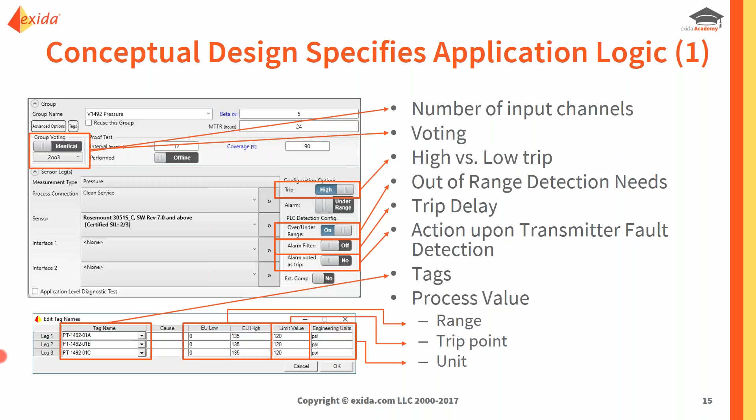Some other information that we specify in the sensor group are the tags. So there's this tags option. If you click on that, you see all this. Now here's your tag names. In this example, I'm talking about PT1492-01A, B, and C, with ranges of 0 to 135 psi and a limit value of 120. All that information is information that you need to program in your application program. So within the sensor group, there's a lot of information specified that you eventually will need to transfer into application logic. So next let's look at the logic solver.

All right, that's not so exciting. The logic solver, of course, from a conceptual design, you just select the type of logic solver you have. This is where all the logic is going to be implemented, but there's not a whole lot of programming information specified here. What is specified, though, is if you have multiple controllers, to what controller the particular safety instrumented function belongs. So in this case, you'll see it's a tank farm name on the controller. That's the controller that this particular function belongs in.

Then lastly, we have conceptual design for the final elements. So again, we see a screenshot here from the SILver tool. The screenshot shows the configuration of a final element group. And one of the things we configure here is the voting, and the voting tells us, in this case, one of the two, the number of output channels.

You'll see that unlike the sensor group, where I said it tells us the number of input channels, I had a second bullet that says it tells us the voting. You won't see that here in the final elements, because how does the logic solver typically work? The logic solver doesn't pick and choose which output to energize or de-energize. It just de-energizes both in case of a trip, assuming a de-energized trip system.

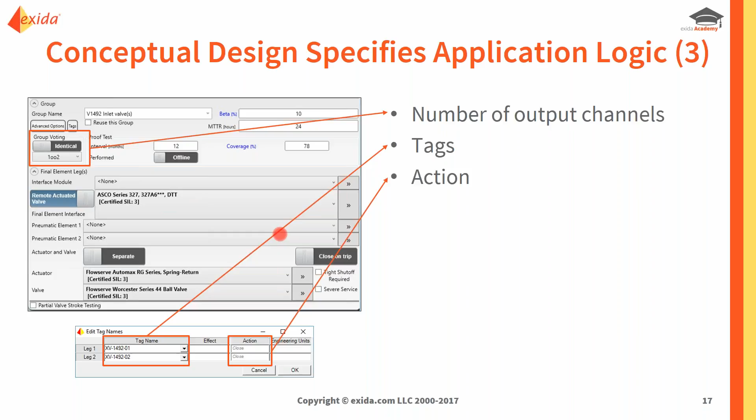In addition to that, we can specify tags, so XV1492-01 and 02, and the action, in this case, closing on trip, is specified. And in this case, you also see it's a de-energized to trip action, not an energized to trip action. So those are things that we specify in the final elements that we need to know when we configure our logic solver.

So the next aspect of conceptual design documentation is when we dive into our design SRS. In the design SRS, we specify information like how do we handle maintenance overrides, how do we deal with bypasses, how do we deal with startup overrides. So if you have a low-level trip, you need to make sure that there first is some certain level in the tank. You need to bypass either for a certain period of time based on a certain event or based on a certain variable giving a certain value. So that can be configured.

Then, if we do have a trip delay, so if we filter out transmitter alarms or faulty signals, we need to specify those time intervals, and we can do that here as well. So you see these 3 or 4 boxes here immediately tell you what are the maintenance overrides, the bypass management, the startup overrides, as well as your trip delays that you need to configure as part of your logic.

And lastly, when it comes to inputs, we have auxiliary inputs. Now, we all know that when we model a safety instrumented function, we only model those pieces of equipment that are absolutely needed to detect the hazard and bring the process to a safe state. Anything extra is typically not considered part of the safety instrumented function. So we could have additional inputs that we may want to trigger the same events, but if they're not part of the safety instrumented function, we wouldn't include them in our SIL verification. But in the design SRS, where you're specifying how your safety instrumented system needs to be implemented, we do, of course, need to specify what those auxiliary inputs are.

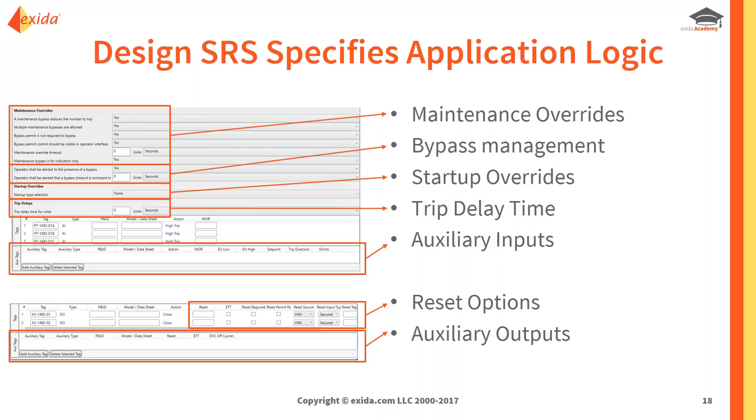So if you have this information in electronic format, you can print it, and then you can read those printouts and start programming, or you just have that information available in your electronic format already, and you just transfer the information. And that makes your life cycle a lot easier to manage. And there's a lot of typing that you don't have to do.

So that brings us to the benefits of the automatic logic creation. And now, you create the logic automatically. Therefore, you guarantee consistency with the design that was originally specified, and any implementation errors are avoided while you're trying to interpret and just transcribe the design information. As I mentioned, as some of my tasks, every now and then I attend the factory acceptance test, and we see quite often that the input to the original logic creation is a cause and effect matrix. And then we see that that cause and effect matrix gets interpreted and then programmed in the logic solver.

Well, I was at one factory acceptance test, and we looked at the cause and effect matrix, and everybody interpreted the cause and effect matrix in a consistent manner. So you would think the application code is right. Well, then there was one of the engineers who was actually explaining how the process worked, and we all realized that there were two interpretations to the cause and effect matrix, and everybody had the wrong interpretation. So the conceptual design, which was clearly documented in SILver, which was unambiguous in SILver, became ambiguous in the cause and effect matrix and resulted in an incorrect application program. So we had to fix that.

Okay, that's why you do factory acceptance test. But this avoids your simple copy and paste error. Instead of a trip limit of 120, I accidentally typed 105, and you may have more spurious trips than you intended. Also, because the programming only takes a fraction of the time, because you click on a button and your logic is created, your conceptual design can be completely finalized before programming starts.

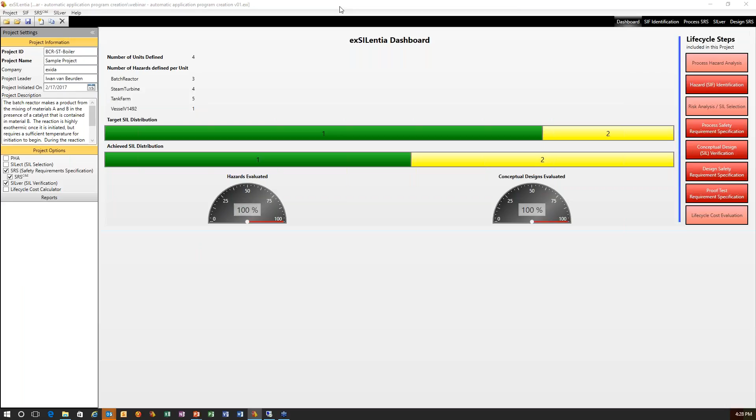So in the exSILentia software, I've created a project, a very simple project with a couple of different things to identify. We have some SIFs that are related to a batch reactor, a batch chemical reactor. We have some SIFs that are related to a steam turbine. We have some SIFs that are related to a tank farm, and then we have that SIF that I showed you earlier, the screenshots of where we have a 2 out of 3 voting driving 2 valves.

So we're going to play with that a little bit. You're going to see what the impact is of some of the selections, and then we're going to go back to some of the other functions. I'm going to point some things out that we will then see in the logic as we create it. So I'm going to the SILver tool, and I assume most of you are familiar with the SILver tool. And in the SILver tool, we model our conceptual design. In this case, a single sensor group with a 2 out of 3 voting, going to a logic solver, driving 2 outputs.

So let's look at that sensor group. We saw the high trip. We saw that the out of range detection is on. We've seen the tag information. So in here you see PT 1492-01A, B, and C, and you see ranges. And just to make sure that you all see that this is a live demo, that I'm not using a file that we pre-created, let me just change these ranges.

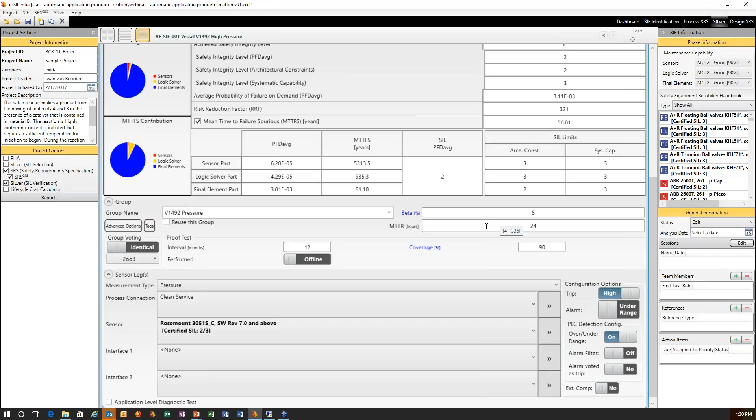I can go to my final element group. The same story here. I have my tags. Let me click on that. The tags here: XV 1492-01, 1492-02, closing on trip. That matches up with what I specified here. And the logic solver that I want to assign this to is apparently called the tank farm logic solver. So that is a simple function: 2 out of 3 input, 2 outputs. Nothing too special, but we'll see what happens when we start to convert that.

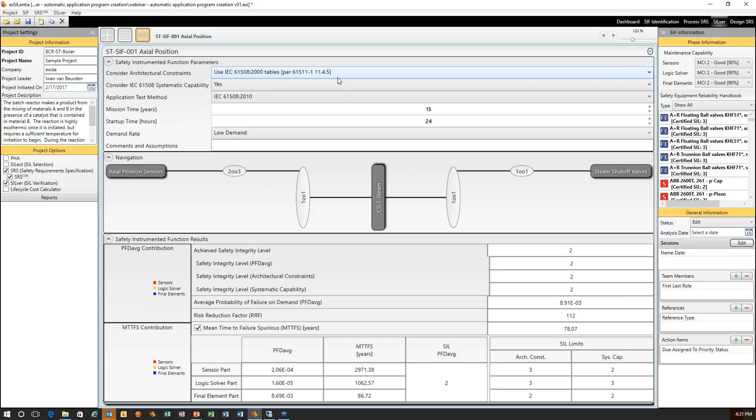So let's look at some of the other functions that we have in here. We have a steam turbine in here. And what you will see when I open this function is that there's a steam shutoff valve. And that steam shutoff valve, just a single valve, 1 out of 1, is used by all the functions that are in the steam turbine scenario. So if we look at the SILver menu and we go to group reuse, you will see here that for the final elements, that steam shutoff valve is used 4 times in SIF 1, 2, 3, and 4 that are associated with my steam turbine scenario.

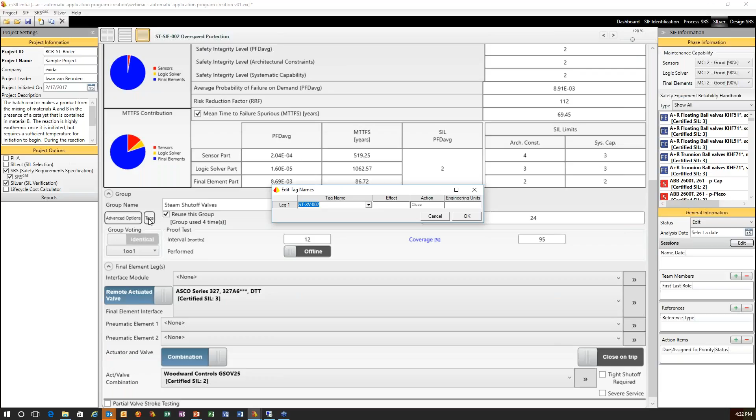And this is SIF ST-SIF 001 axial position. So we have a 2 out of 3 voting on the inputs. We have a logic solver, and you see that's that steam shutoff valve output. We go to the overspeed, 2 out of 3 voting in this case as well, and you see the same shutoff valve. And just to see, the tag is STXV002. If we go to the loss of lube oil, you'll see it's the same tag, STXV002, the same valve, as well as for the last one, which is SIF 004, that same steam shutoff valve. So it's the same valve that is used by all 4 of my steam turbine SIFs. And we can easily model that in SILver with the reuse group.

Then let's look at this batch chemical reactor. What do you see here? We have a simple input, high pressure going to a single valve, the drain to the quench tank. We'll come back to that in a little bit. Then we have one that's a little bit more complex. That's a reactor overfill. We have a single input. We have 2 outputs here, reactant A feed and reactant B feed. And you'll see that both need to happen in order to prevent the overfill scenario.

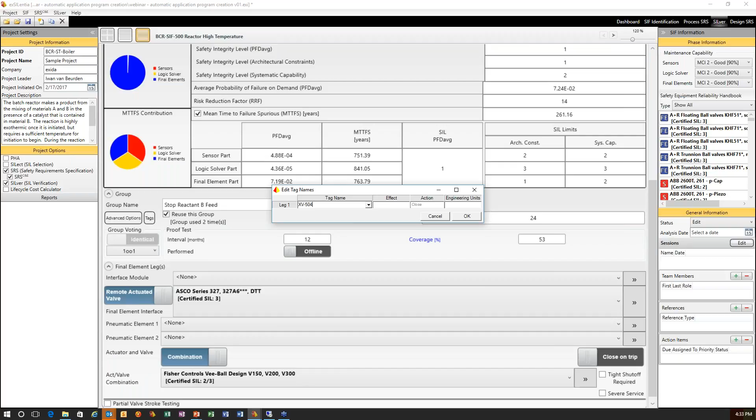And now if we go to the first one, SIF 500, it's a high temperature scenario, single input, but what do we see? That stop reactant B feed is part of both SIFs, part of the overfill SIF as well as the high temperature SIF. And notice this is XV504, so you will see that coming back in a little bit as well. So in this case, 2 final element groups. One is the cooling jacket and one is the reactant B feed that needs to stop.

Lastly, let's look at these tank farm SIFs. They are not very special. They're just simple one-to-ones, 1 input, 1 output. But what you can see here is that if we go back to the SIF identification, you'll see that we specified that this is part of this tank sheet.

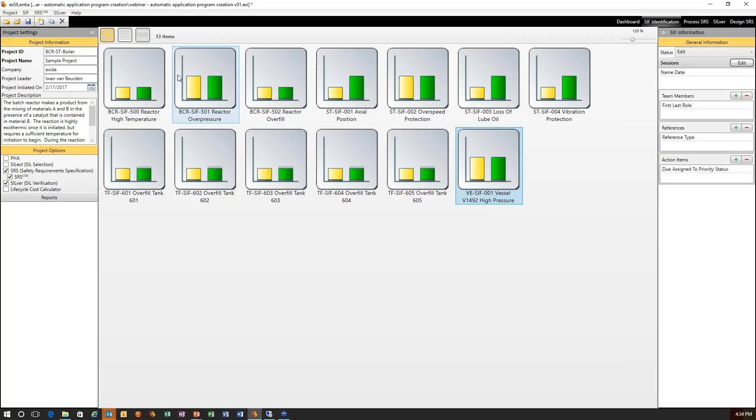So there's something special with these SIFs. And basically what is special is we specify that they need to be part of the tank sheet. So whatever that means, we'll see that in a little bit. And you see that this last one, for example, is not part of the tank sheet. All right, so that is a quick overview of some of the settings. There's a little bit more.

So let's go back to the overpressure event. The SIL scenario, we see the drain to the quench tank. Look here in the design SRS. You'll see in the design SRS, in this case, that there's 3 auxiliary actions: XV501, 502, and 504, in addition to XV500. So there's additional auxiliary actions, and apparently we do that through a parameter, whatever that means. So that is something that we've configured here.

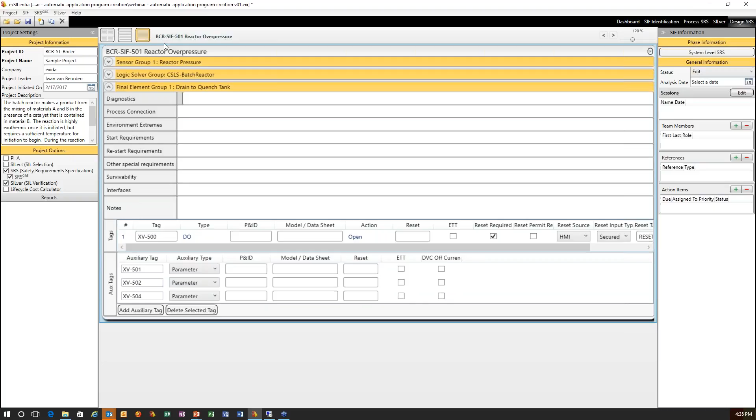And then up here you can see your maintenance overrides and all that. Here's how do you alert an operator when the bypass is about to time out in 5 seconds and things like that. So all that can be specified in the tool. So once we have completed our conceptual design, we've specified everything in the SIL verification, we've done our additional specification in the design SRS, we can then create the logic.

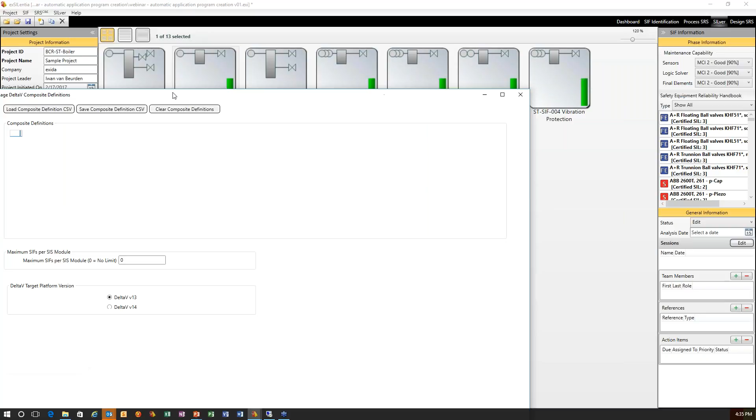So what we're going to do here, we're going to the SRS C&E menu, and we'll see 2 menu options related to DeltaV SIS. The first one is Manage DeltaV Composite Definitions, so let me select that one first. For those of you who are familiar with DeltaV SIS programming, there is a possibility to have composite blocks within a project. A composite block can, let's say, replace all 2 out of 3 blocks within a particular project. You specify the composite block once, and then throughout the logic creation, this configurator will automatically replace the standard 2 out of 3 voting block with the composite block.

In this case, I'm going to keep it simple. We're going to just have the standard blocks, but this composite block definition is already functioning in our current proof of concept or advanced proof of concept. We can also specify the number of SIFs that are maximally allowed on a SIS module. In this case, we leave it at 0, which is unlimited. And then the target platform. So in this case, we're working with DeltaV version 13. So that's our target platform. So that's the management aspect of the configuration.

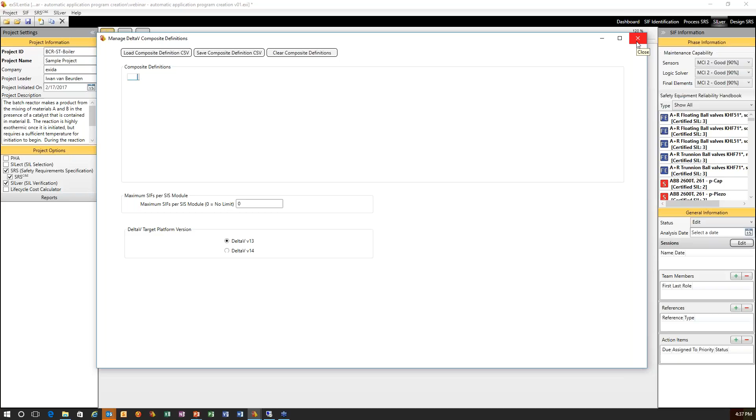And then when we go in the next one, we actually go and generate the logic. So let me generate DeltaV SIS configuration. You will see the dialog appear that we also saw on the slide. There's some description here. I'm going to export everything, all SIFs, and I'm going to export everything in one file.

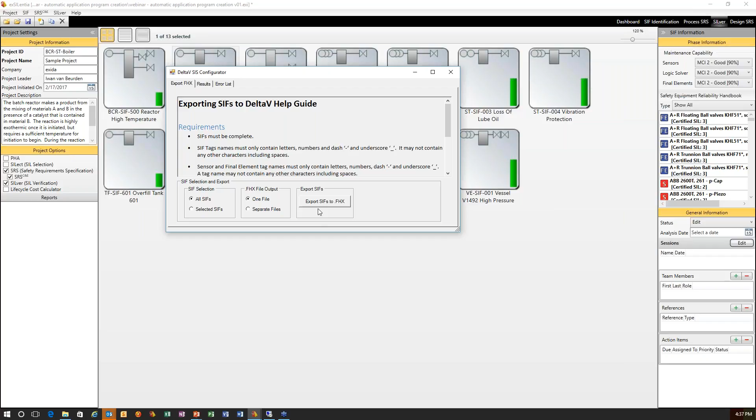When you first create your logic, when you first create your initial program, it makes sense to just do everything at once. If you would have a little tweak to a particular safety function, you may get to a point where you say, hey, I only want to export this one safety function, or I want to export the safety function in separate files and only import the one file that really changed. In this case, I'm just going to export everything at once. And we're going to export SIF to an FHX file by a simple click of a button.

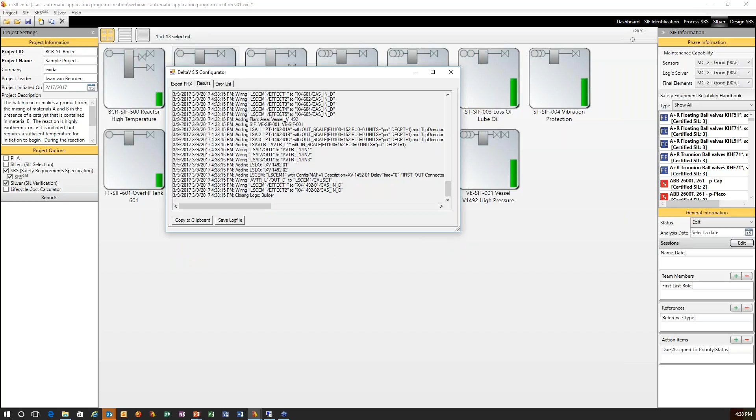And the file that we're generating is called sample project. Look at the timestamp here at the end, 2017 0309 1638. So it's 4:38 p.m. East Coast time. That's the date on the file that I just created. And I'm already done. The file already exists. So hit OK here. We see a quick summary of the configuration that was done, as well as an error list. So if there will be any errors during the conversion, they would show up here.

In this case, everything is just fine, no errors. So let me go to my folder here, and you'll see a test file from the first webinar, the test file of the second webinar, and then here's the test file of this webinar, and we have the simple log file, everything that happened. And then here we have the FHX file.

So I'm going to copy that file, and I'm going to go to my virtual DeltaV environment. And in my virtual DeltaV environment, I'm going to say I want to import a standard DeltaV format file. And in my case, I'm just going to paste that file here. Actually, let me create a new folder so it's easier to see for you where I am in the file structure. So I'm pasting that file that I just copied here.

You'll see it's the exact same name. 1638 was the timestamp, so that's the one that I just created. I select it. I hit open. There's a couple of messages here that I just know I have to hit no to all, but that's just because I'm importing.

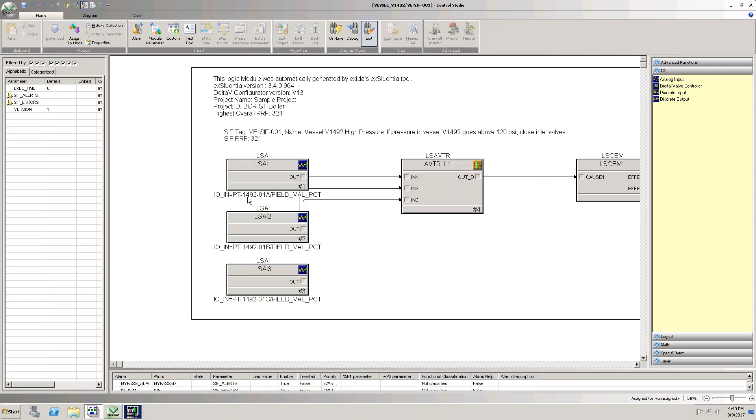And what do we see? Let's see if the spotlight works here. We see 3 inputs going into a voter, driving a CEM block, driving 2 outputs. So now that we've seen that, I have to get rid of my spotlight again. Let's zoom in a little bit. And what do we see? We see that the input here is called PT-1492-01A, B, and C. Those were the tag names of my inputs.

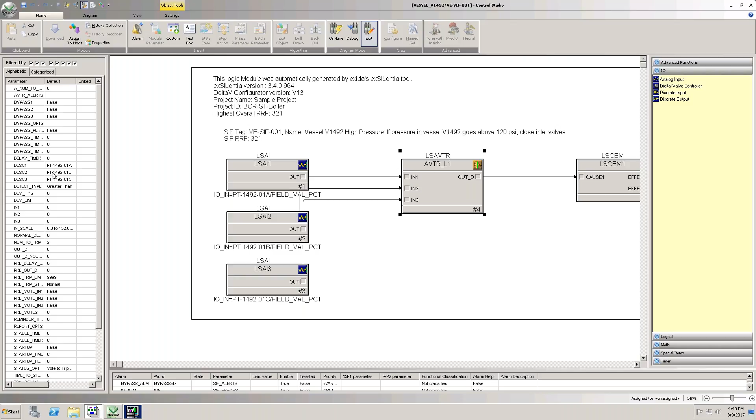We'll see that at the final elements, XV1492-01 and -02. Those were the tag names for the final elements in my function. Let's look at the voter. When I click on the voter, there's this parameter information available here on the left. And one thing that we see is there's 3 inputs. The tag names are put into the description of the 3 inputs. We see greater than; we had a high trip.

So if the value that I'm measuring is greater than the trip point, we need to go to the safe state. The range is specified as 0 to 152. Remember, I changed the 135 to 152, and it's PSI. And we see that here, that's the scale. If I go all the way to the bottom, you will see the trip limit here at 136. We changed that value from 120 to 136 in our file.

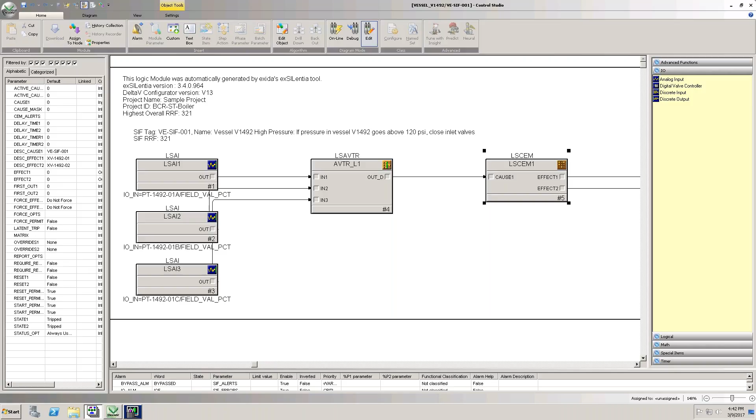You will also see here that the number needed to trip is 2. I've got 3 inputs. 2 out of 3 need to indicate that I need to transition to the safe state for my safety function to act. So all that is taken care of in this analog voter. That analog voter is generating a single output that then drives the actual outputs. So a single output of the analog voter becomes a single input into the CEM block, which is driving 2 outputs, XV1492-01 and 1492-02.

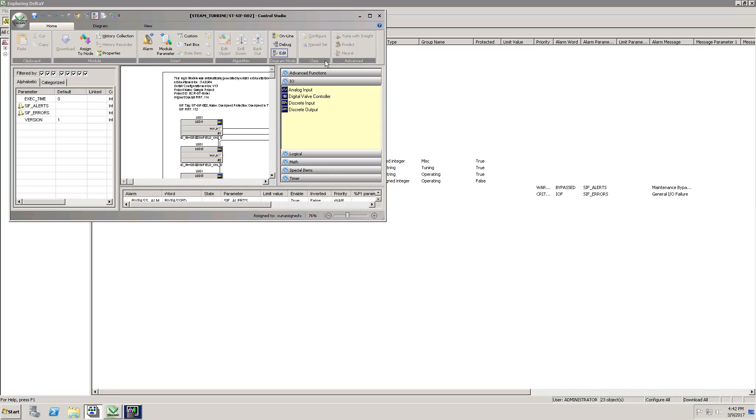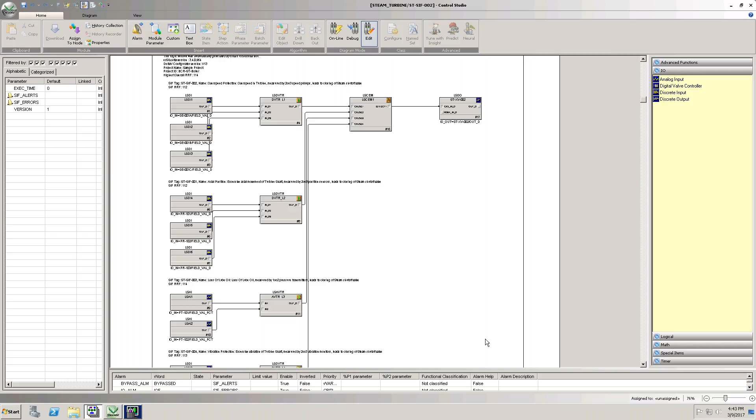So that is our relatively simple safety function, 2 out of 3 voting, driving two final elements. So let's look at my steam turbine. I had 4 functions on the steam turbine, but I only have 1 logic sheet or 1 SIS module. Let me open that up in Control Studio and expand that. And what do we see? 1 output driven by 4 inputs. Each of these is a separate safety function, but the tool knows it's the same final element that's being driven.

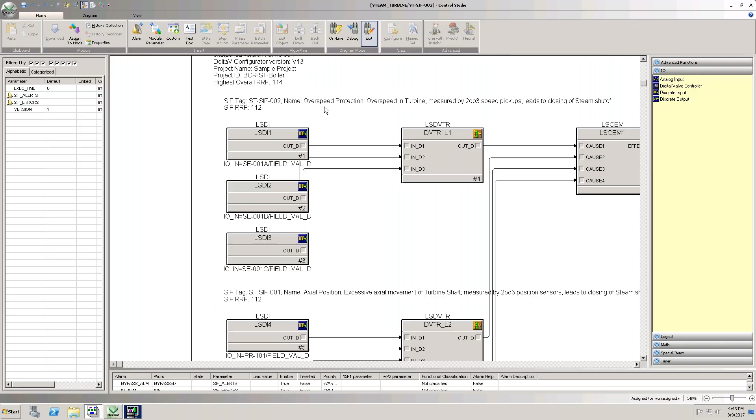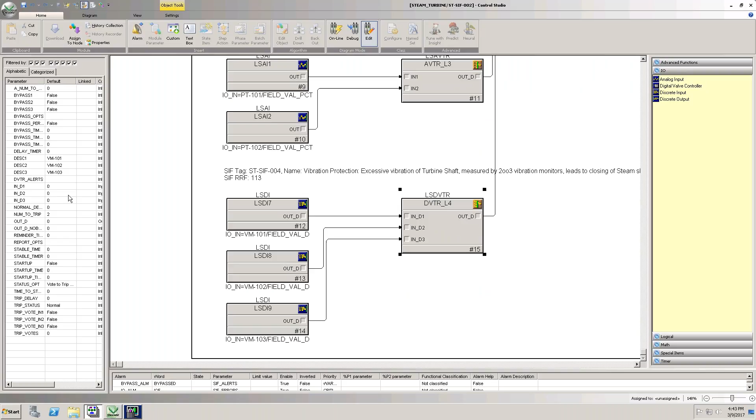So we have, let me zoom in again, overspeed, voted 2 out of 3. We have axial position, voted 2 out of 3. We have loss of lube oil, voted 1 out of 2. And we have vibration, voted 2 out of 3. Those voters are in here. These are digital, so they're on-off signals. The number to trip is here. We have 3 inputs. There's my 2 out of 3. For the analog here, we have number to trip 1. 2 inputs, 1 out of 2, and so on.

Resulting in 4 causes in my cause and effect block, 4 different safety functions, all driving a single output. So that is pretty cool. The tool knows that that same final element is part of multiple functions, and it nicely puts all that on the same logic sheet.

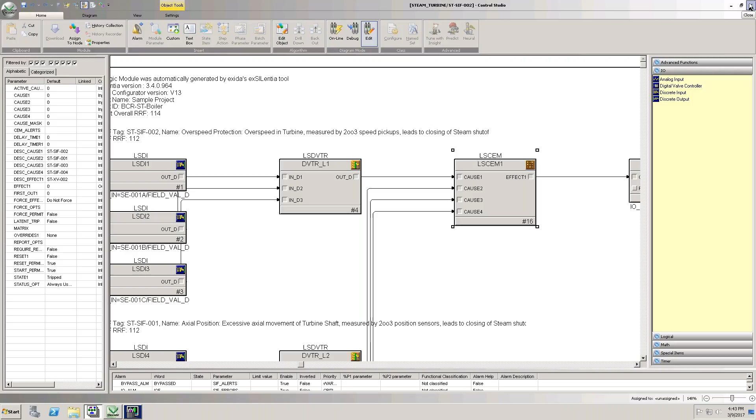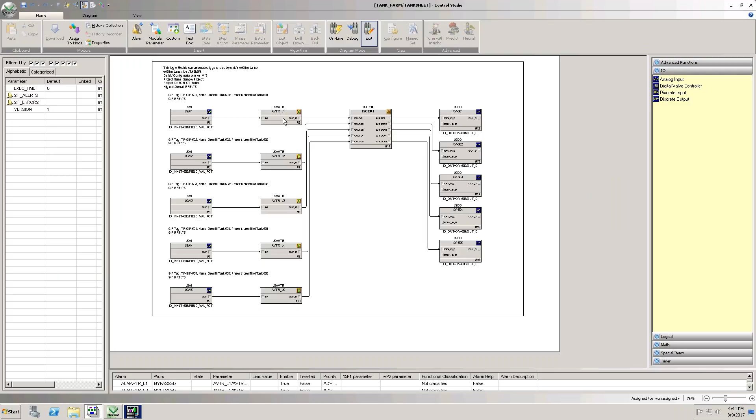Let's look at the tank sheet. The tank sheet was interesting in that we had these 5 functions. They were very simple, all 1 out of 1 input, 1 out of 1 output. But we marked them that we wanted them grouped on 1 sheet. What does the tool do? It groups them on 1 sheet. You'll see 5 inputs, 5 outputs, 5 causes, 5 effects in the CEM block.

If we open it up, you see that each input only drives 1 output. So very straightforward. Each SIF has 1 input, drives its own output. The only thing the tool did, it nicely placed them on 1 logic sheet, so it's easy to look at, easy to maintain. And then lastly, let's look at our batch chemical reactor.

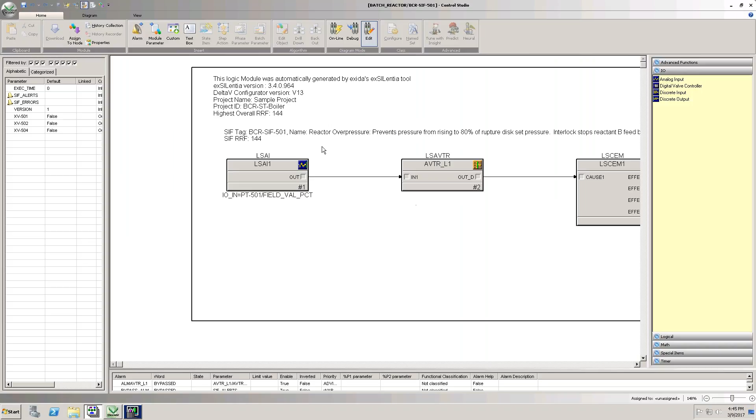And we're going to start off with this 501 function. That was the overpressure of the chemical reactor. It had just a single input, 1 out of 1. It was an analog, so there's an analog voter. In this case, the voter is just a 1 out of 1 voter, but that's where all the logic is happening. So the greater than, the ranges, the trip points, all that is specified there.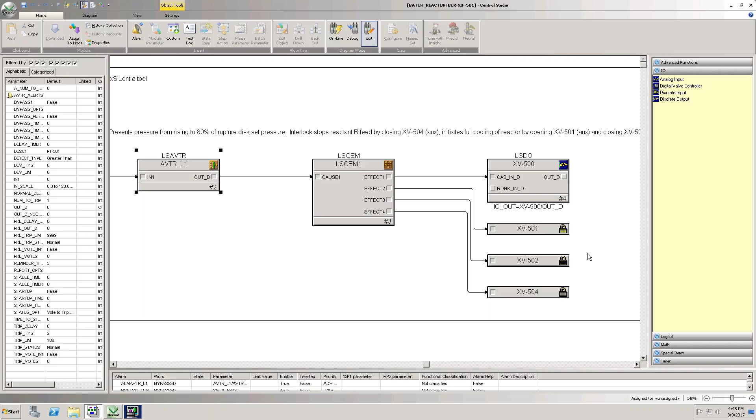And you see there's a total of 4 effects. Only one of them, the XV500, is part of my safety instrumented function. The other 3 are auxiliary outputs. Remember that I showed you that you can specify auxiliary inputs and outputs? Here's 3 auxiliary outputs that are specified, and in this case they're specified as parameters, and those parameters can then be linked to the actual outputs. So that's pretty neat.

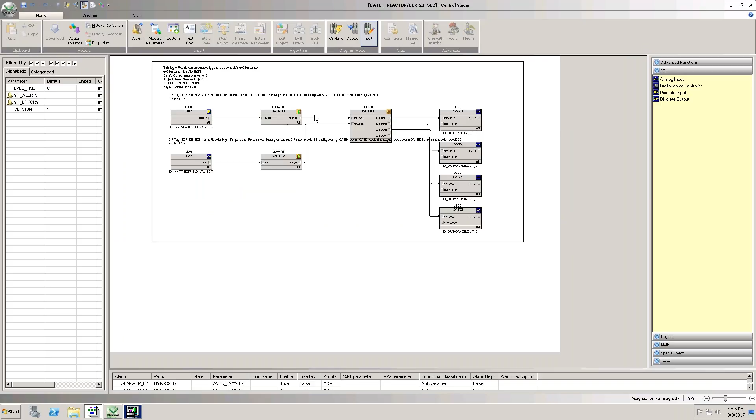And then lastly, let's go to the last batch chemical reactor sheet. That one was a little bit interesting in that we basically had 2 functions. I'm going to zoom out again. One function was closing A feed and B feed. The other function was doing a couple other things, but it was also closing the B feed, total of 4 actions. The B feed was XV 504. So you see that right here. So that should be part of both functions.

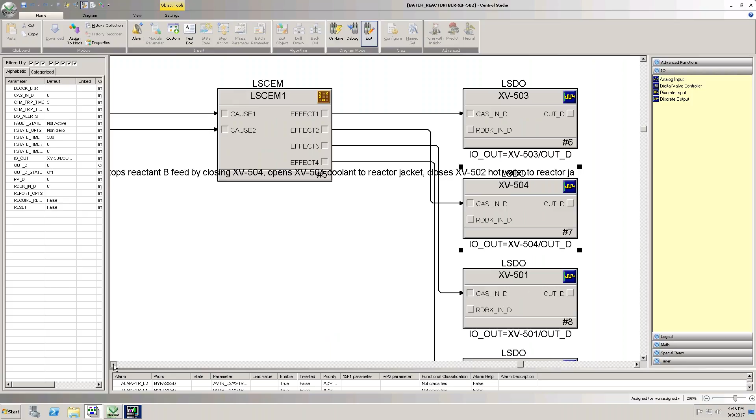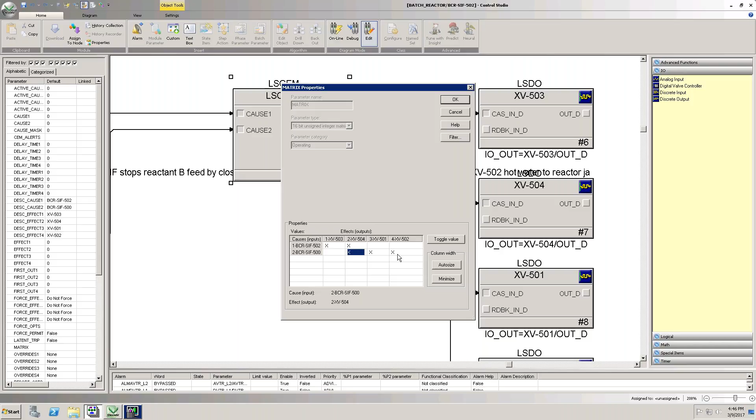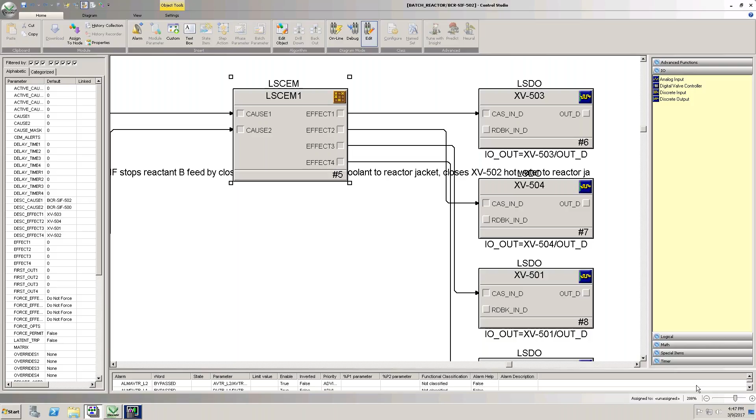So let's look at what the cause and effect block does. We have SIF 502, which de-energizes 2 outputs, feed A and feed B, and SIF 500, which de-energizes the reactant feed B. So you see that this particular output is driven by both of the functions. And again, because we're reusing a final element, the configurator knows that is the same final element, that they need to be nicely combined on one logic sheet or one SIS module within the DeltaV environment. So that is in a nutshell what the configurator does.

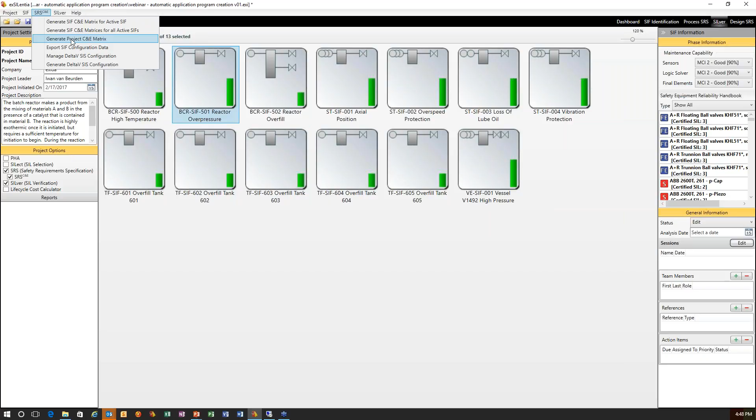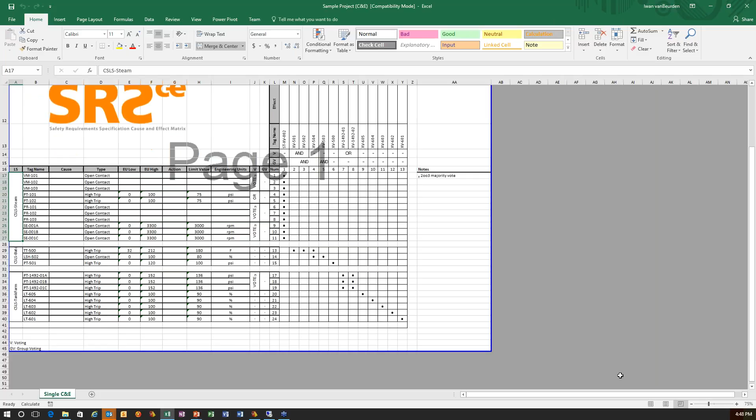Let me close this and go back to the tool. If you are familiar with the exSILentia software, you may know that we have the ability to create a cause and effect matrix as well. I'm just going to do that for this particular project, so complete project cause and effect matrix. The reason is so you can see that what we just configured in the logic solver, we can also see in a cause and effect matrix. For example, my 4 steam functions all drive the same final element, and you can see that directly in your cause and effect matrix.

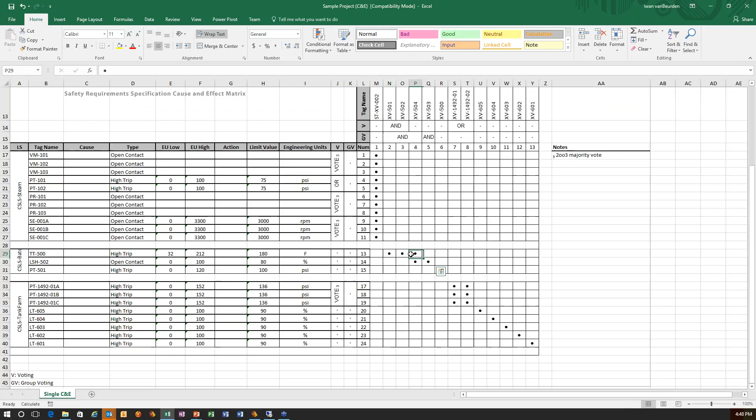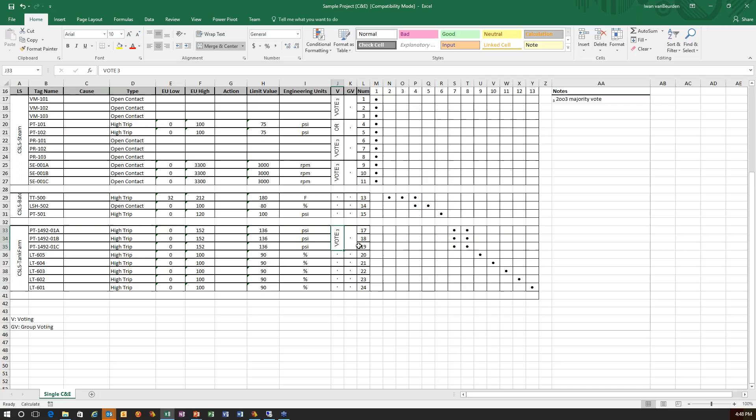The batch chemical portion, we had the one function that drove reactant A and reactant B, and one function did a couple of things in reactant B, and you see that overlap here again. And then for my tank farm, you see the same behavior that we saw in the CEM block. You see that in the cause and effect matrix, as well as the 3 inputs, 2 out of 3 voted. Here's your vote. Here's the description of the vote. 2 out of 3 voted that were driving the two outputs.

So that also, again, confirms what we already modeled through the configurator, and therefore the logic that we generated for the DeltaV system. And that is a confirmation. You could use that during your SAT testing when it comes to verifying that your installed system is indeed doing what it's supposed to. So we go back to my slides now.

Now we saw the demo. We saw how it works. From an exSILentia perspective, we have a variety of tools. We have tools that relate to functional safety. So we do our PHA, process hazard analysis, your LOPA, layer of protection analysis, SIL selection, safety requirements specification, and SIL verification.

In the management column, we already have an alarm rationalization, alarm management tool, as well as our lifecycle cost estimator. And we can now add that logic solver configuration to that management category. We of course have our cyber risk assessment tool, CyberFacts, and our maintenance tools, the proof test generator, as well as our live event recorder, SILstat. So all this fits nicely within the scope of what we're doing with the exSILentia software.